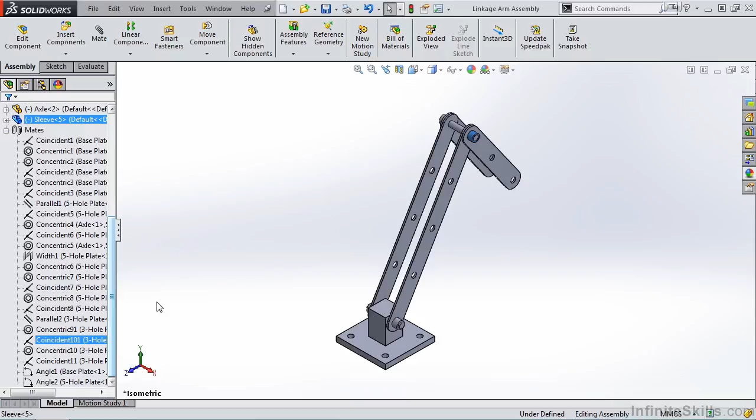So let's begin. I am going to start a new assembly by selecting New, Assembly. And then I'm going to browse for the base plate. This is where you're going to go into your working files folder and find these components. I'll select base plate and then open.

The property manager opens and notice base plate is at my cursor. So I'm just going to pick a point in the graphics area and it's positioned.

Now what I want you to do is insert the axle and then position that axle in this hole in the base plate. Keep in mind that axle needs to be centered in this direction here. So pause the video, insert the base plate, insert the axle, and then mate those 2 components.

Now, I am assuming that you mated those 2 components. Again, there are a couple different ways you can do that. Let me talk about the few different approaches for mating the axle to the base plate and keeping it centered within this block of the base plate.

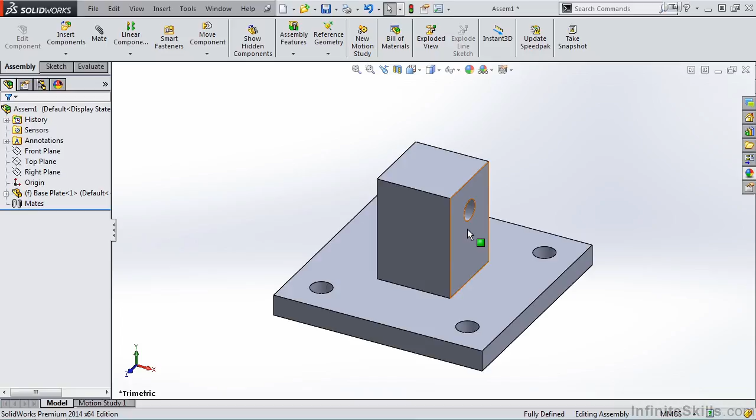I am going to select Insert Component, browse for the axle, and then select Open. For now, I'm going to place it off to the left-hand side in this assembly so we can discuss the various methods for mating these 2 components, keeping in mind that we want this axle to be centered in this rectangular block.

Now, one mate that we could do is the width mate, and that would be a good choice. Another option would be the distance mate. Not such a good choice because most likely you would be applying a distance from the end face of the axle to this face on the base plate. So I'm not too keen on using the distance mate. Right now, the width mate looks like a very good choice.

Another choice would be to mate the planes, and that's the approach I'm going to take. So whether you mated the planes or used the width mate, those are both good options. So let's go to mate.

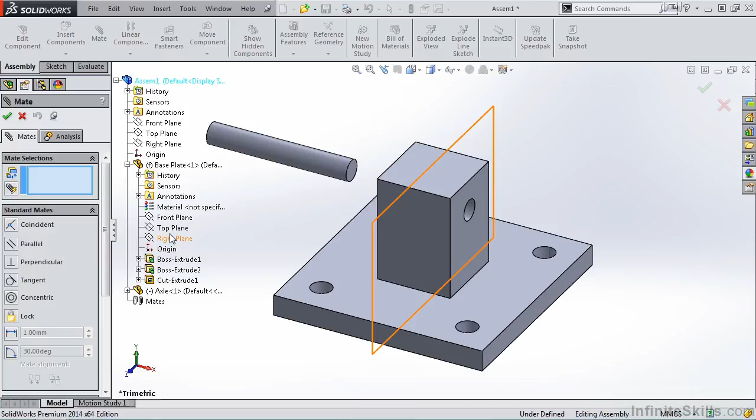I am going to expand the tree, expand the base plate, and then I am looking for the appropriate plane, which would be the right plane. Now I will expand the axle, and it looks like the right plane on the axle is also the correct plane. I'll apply a coincident mate and then accept it. Now the axle is centered left to right.

Notice though, it's not inside of the hole, so that means we need to add a concentric mate. I'm going to select those two features and add the concentric mate. Now before I select the green check mark, do you want to lock rotation? Is that important in this design? I am going to leave it unchecked and accept the concentric mate.

So hopefully you mated the pin with a concentric mate and then used either a coincident between the planes or the width mate. Let's move on to the next step.

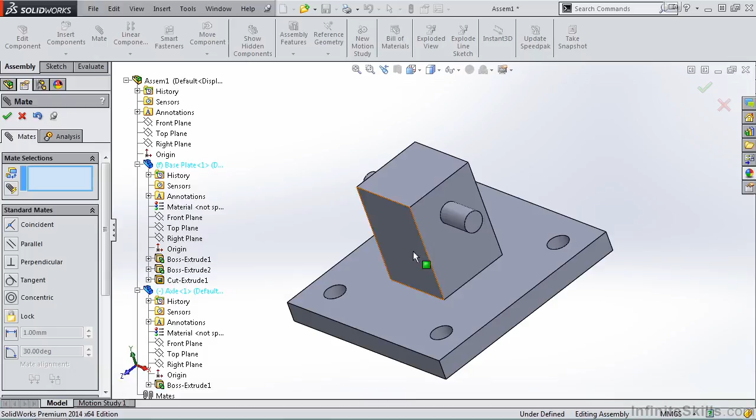Now what I want you to do is insert the two 5-hole plates. These plates need to be positioned over each side of the pin, and the face of the plate must be in contact with this face and this face of the base plate. Let me go back to my finished assembly so you can see what I am referring to. Notice how this 5-hole plate and this 5-hole plate are contacting this face and this face of the base plate.

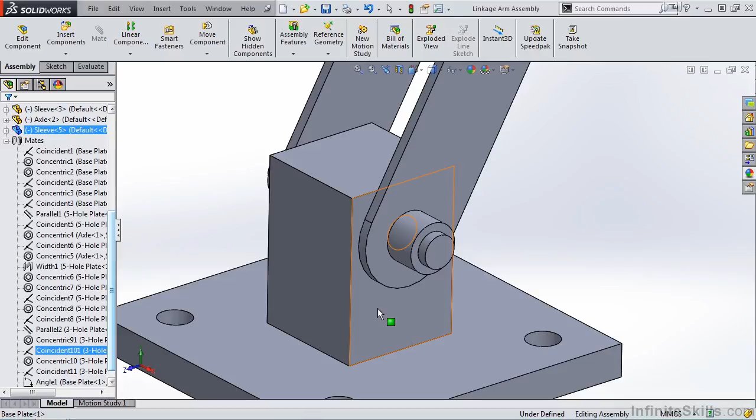Once you mate those two 5-hole plates, then I want you to add a mate which allows these two plates to move together. What do I mean by that? Well, let me suppress the angle mate. Notice when I move the one 5-hole plate, the second 5-hole plate moves with it. So again, pause the video, insert the two 5-hole plates and the appropriate mates.

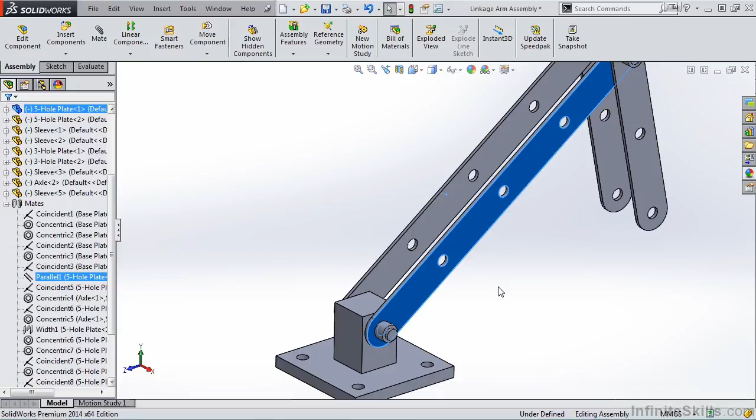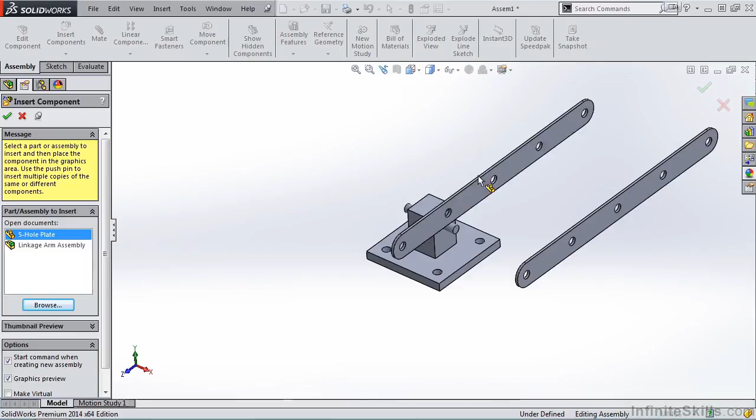Okay, once again, I assume you have the 5-hole plates added and mated and the two 5-hole plates move together. Let me go back to the assembly I am building. I'll insert components. Now, one thing we can do when we browse for the 5-hole plate is pin the property manager open, which allows us to insert multiple components, just like I did here. I'll close out of the property manager, and now I am going to add the first of the mates.

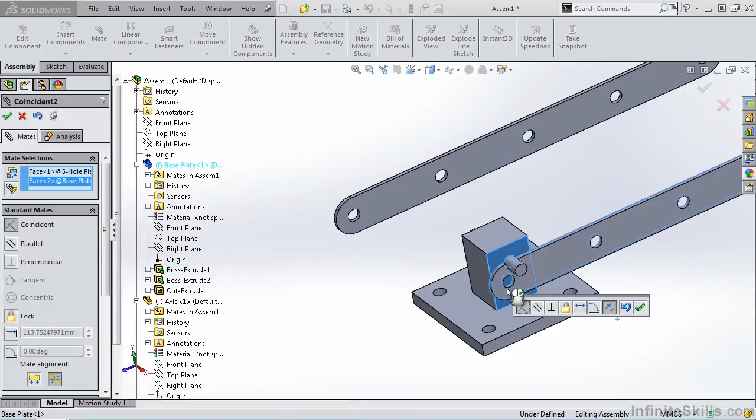The most obvious mate would be the coincident mate. I'll mate the face of this 5-hole plate to the face of the base plate. So I'll select this face along with this one, add the coincident mate, and then I'll select the face of the hole and the face of the pin and add a concentric mate.

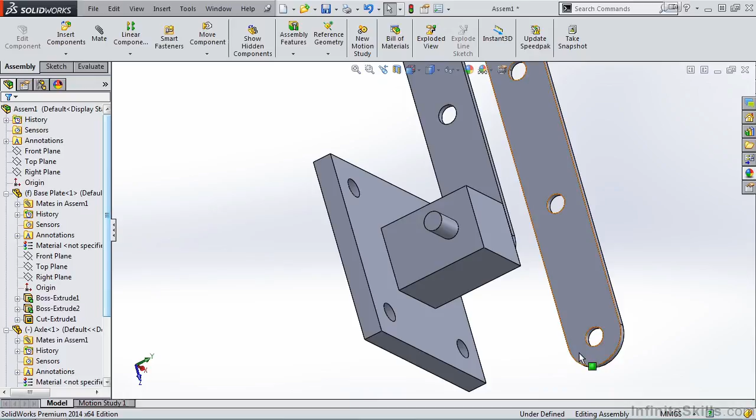Now over here, I can do the same thing, but I am going to do it through a smart mate just to try a different method. In order to apply a smart mate, I must close out of this property manager. Remember, we need to hold down the Alt key when I select this circular edge and then this circular edge on the pin. Notice my smart mate graphic will apply both a concentric and a coincident mate. I'll release the left mouse button and the two mates are applied.

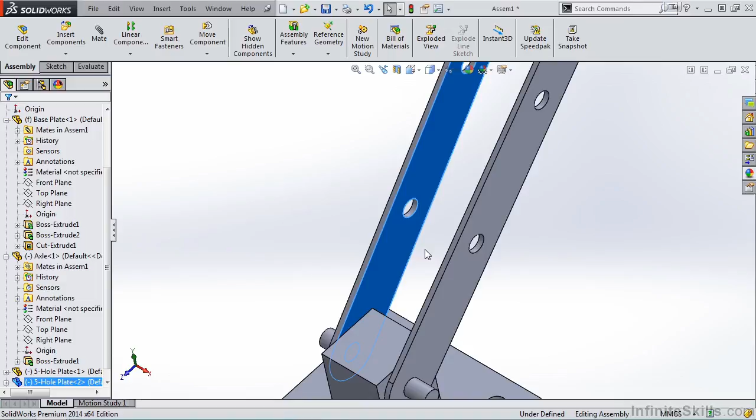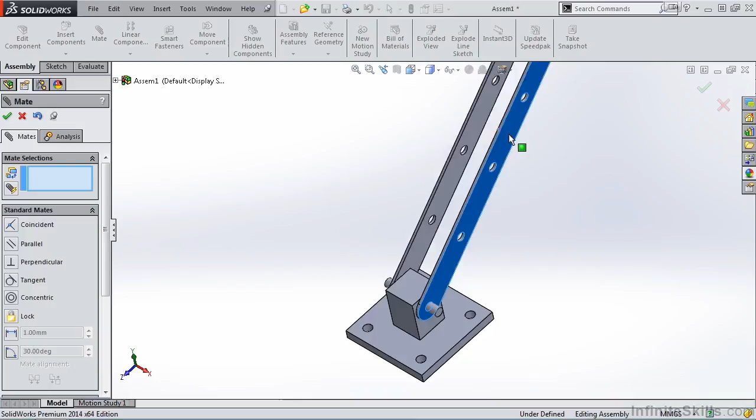Now, how do we get these two 5-hole plates to move together? There's a couple options for that. You can either add a coincident mate or a parallel mate between the two 5-hole plates. So I am going to select mate once again and clear this window. I will select the top face of this 5-hole plate and then the same face of this 5-hole plate. I can either add coincident or parallel. I'll accept it, and notice as we move one 5-hole plate, the other one moves with it.

So let's go ahead and close out of mates, fit this to the screen, and conclude this part 1 of testing your skills, and then we'll finish up this assembly in part 2.